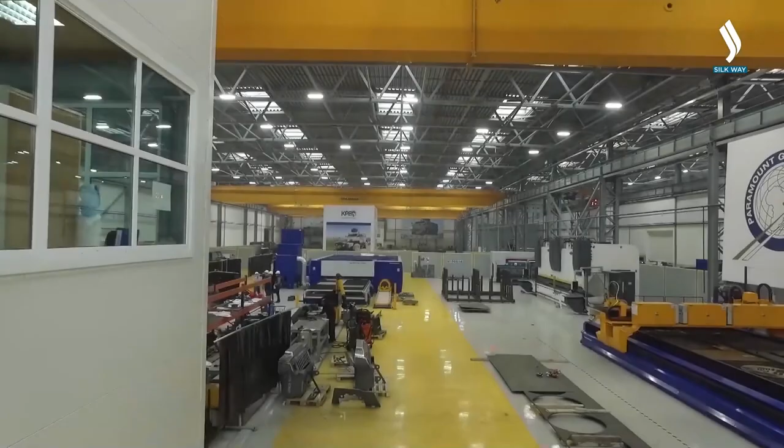Our main specialization is the production of armored wheeled vehicles using MRAP technology. When I see our machines carrying out operations somewhere, it is of course a very great pride. The responsibility for the life of the crew lies with me. I have been working since the first year of the foundation, when there was no equipment yet.

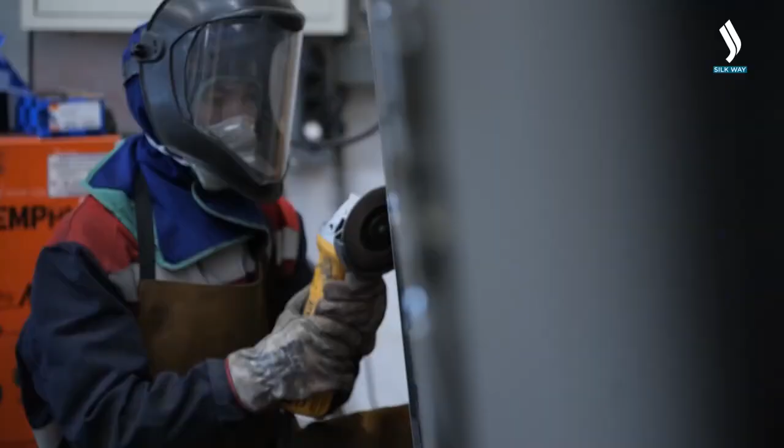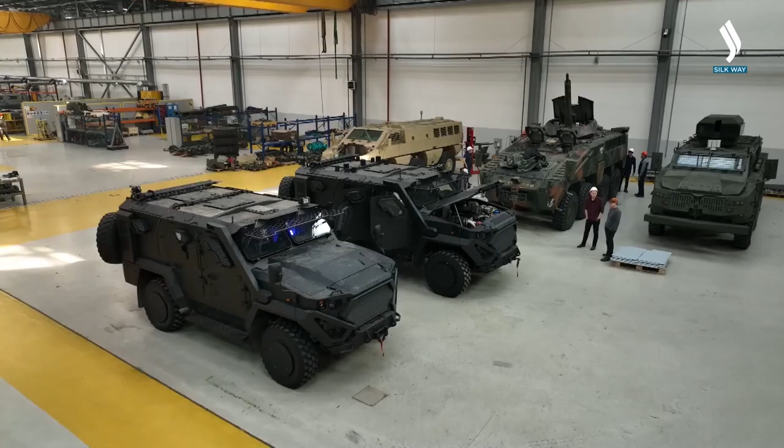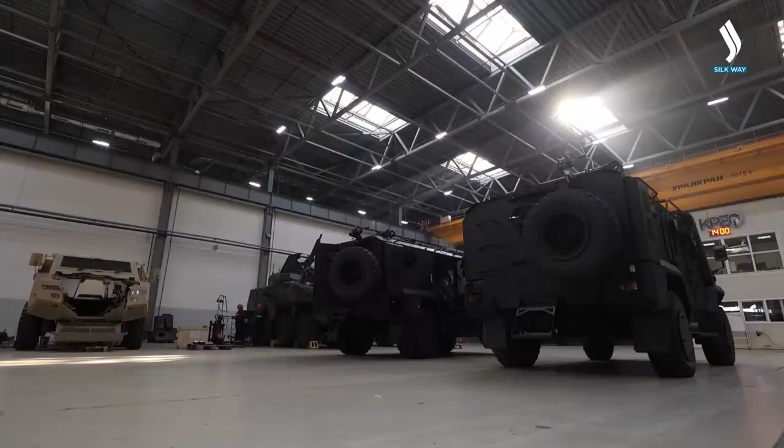Our company was founded in 2014. We started the project in the same year. In 2015, we handed over this facility, built this project and started the production of armored wheeled vehicles. Our main specialization is the production of armored wheeled vehicles using MRAP technology.

These are highly protected vehicles. They are well protected from the explosion of mines and they have high armored protection. These are modern armored vehicles that have been widely used in the world. Analyzing this market, we have come to the Paramount Group company, a large South African company in the defense industry. It produces both armored vehicles and works in other areas.

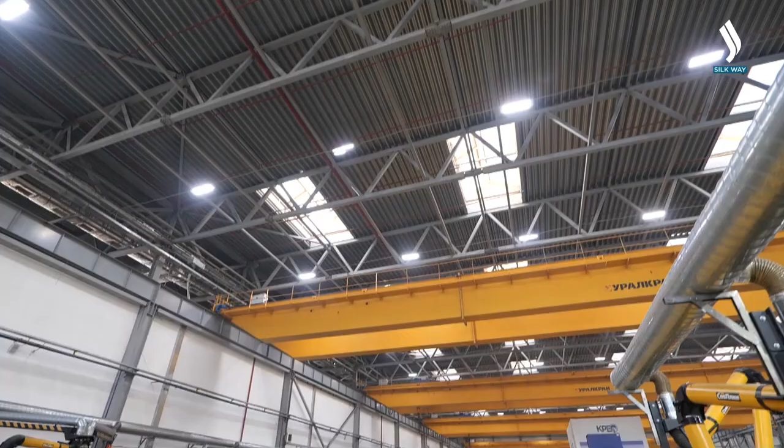Why did we choose them? Because our main condition was localization on the territory of Kazakhstan. Not a screwdriver assembly, but the localization of the entire production process in our country. They gave us all the documentation. The main value of this plant is not the buildings, but the design documentation and our personnel, which we can say we have nurtured.

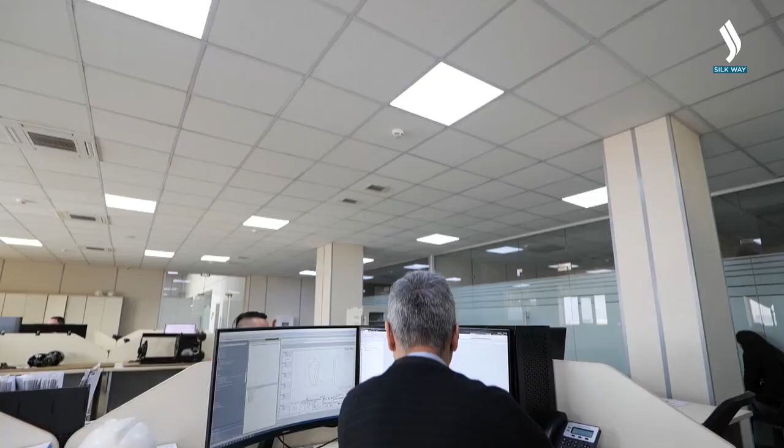I am 23 years old, born in 1999. I have been working for the company since September 2021. I got a job as an ordinary locksmith. Gradually, through my perseverance and aspiration, I got promoted. Now I am a design engineer of electrical systems.

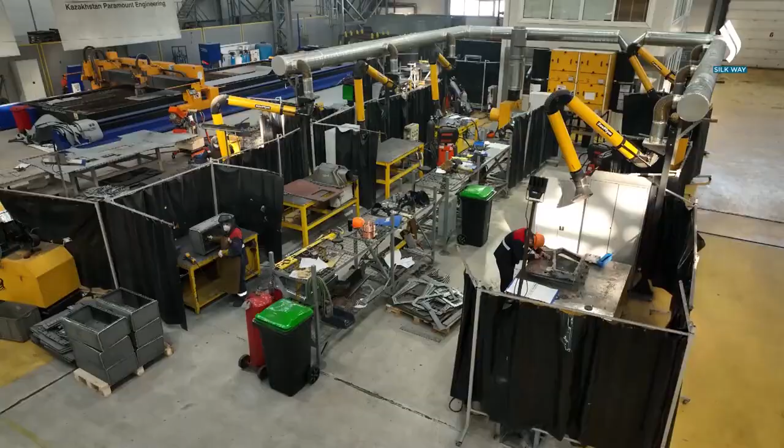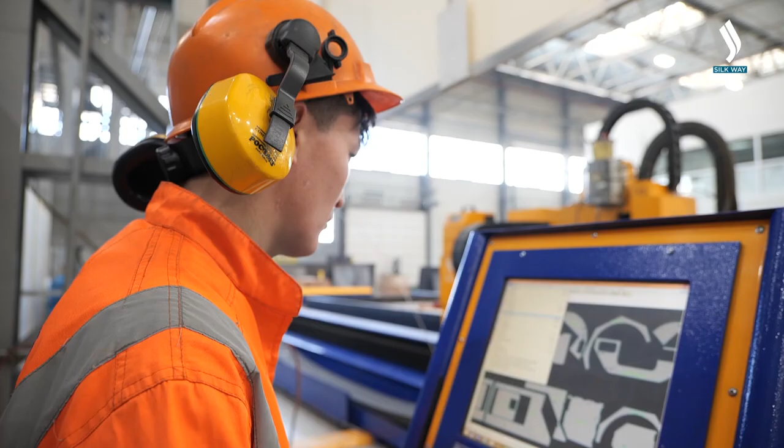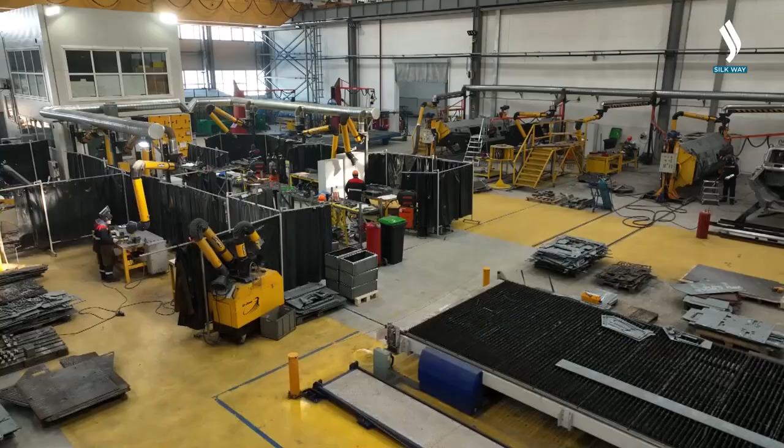I studied mechanical engineering. I came to work here by profession. I like to work with technology and the fact that there is also a computer here. I like to work with technology more than with people. In this regard, I feel comfortable. Well, like any person who wants to grow, develop, learn more. I've been here for 7 years. I've seen a lot, and I know a lot.

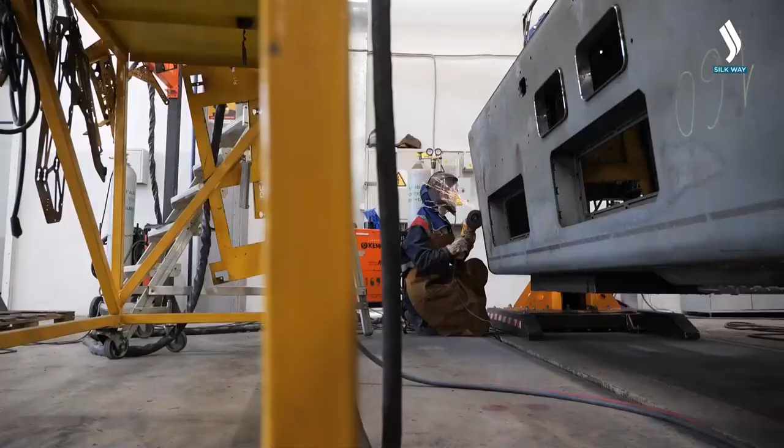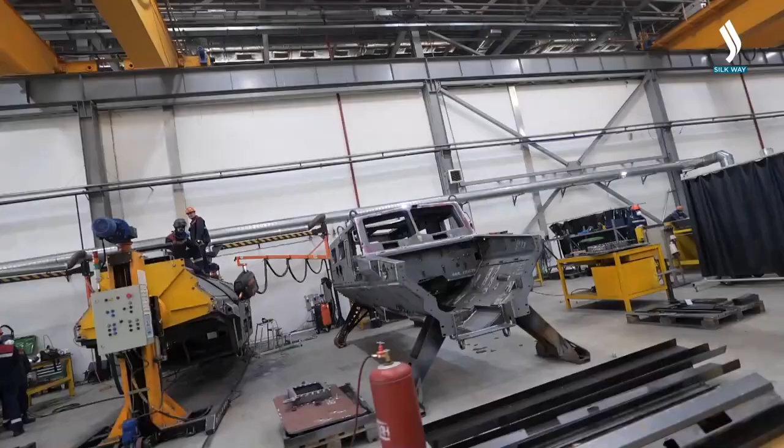The most basic thing we have here is our design office. We have Kazakhstan's certificate where we have more than 70% of localization, depending on the configuration of the machines. We have practically localized those processes that could have been localized in Kazakhstan. We can say a metal sheet comes to us, and a finished machine comes out at the end. This whole localization would not be possible without the documentation if we did not have our own office.

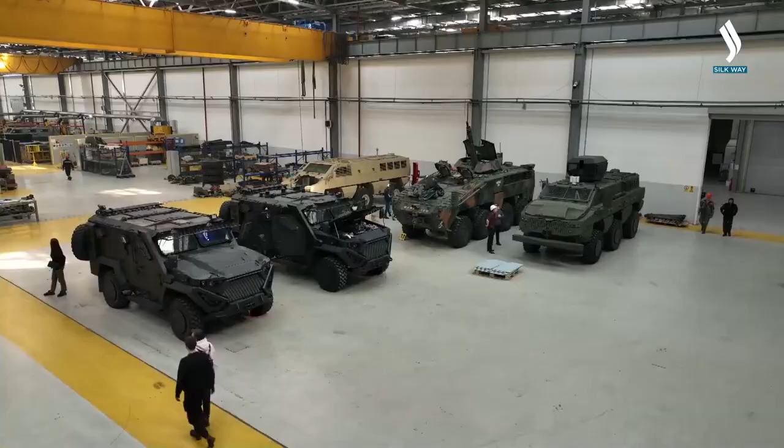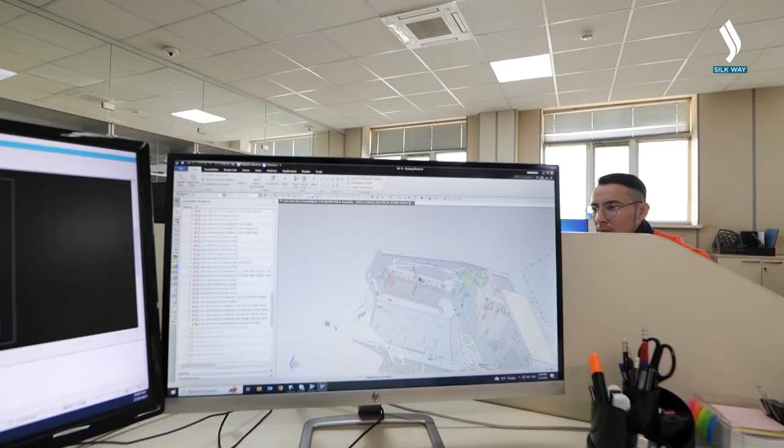We developed the design office and reached such a stage that in 2019 we began production of our own machine, Alan 2. It is a completely Kazakhstan development. From the idea to its production, it is completely made by our Kazakhstan people. This is not a technology transfer from South Africa. This is not a ready-made machine we have adopted from somewhere. The guys were drawing and selecting technical specifications by themselves. In the end, we produced a car and last year we presented it, including to our law enforcement agencies.

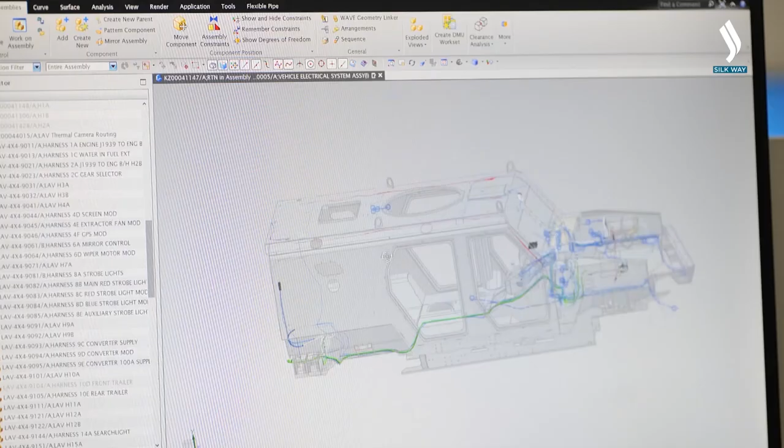After a harness is fully designed, we proceed to the actual laying of this cable. All harnesses and cables are assembled according to the standard which specifies absolutely everything, including how much cable we need to use. After the layout is completed, we send it to the foreman of the electrical assembly shop who distributes duties among electricians. That's how it's done. After the harness is fully assembled, it is delivered to the assembly shop.

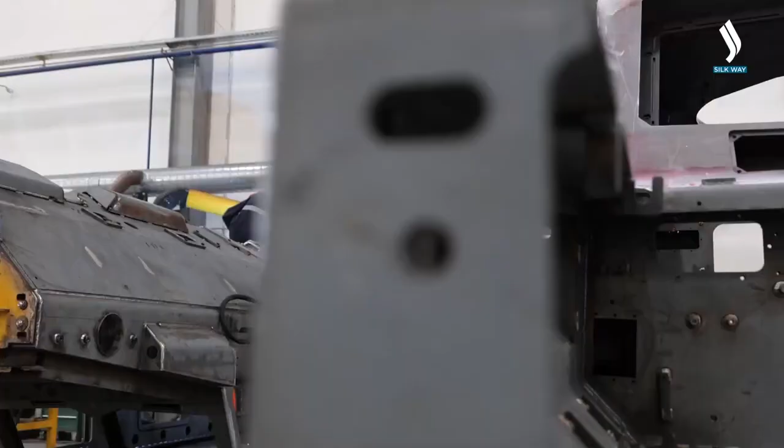Our work is full of responsibilities. Imagine military actions are taking place. We have a radiation, chemical and biological protection system. If it fails due to my mistake, the crew would be exposed to chemical attacks. I am responsible for the lives of the crew.

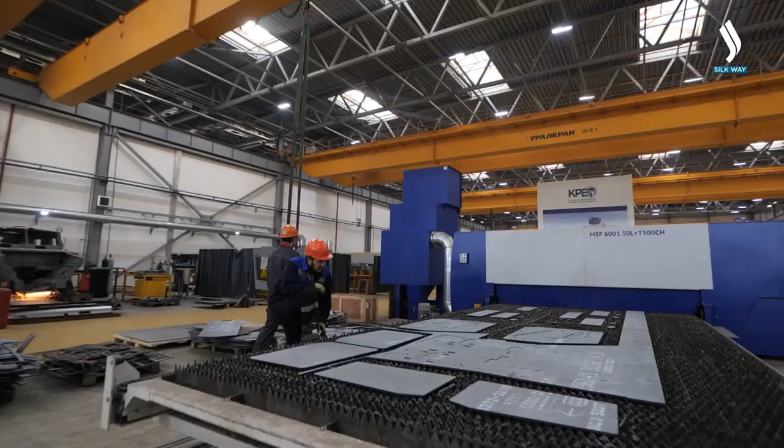The raw materials we use are Swedish-made armor steel. We buy it from there. Unfortunately, such steel is not produced in Kazakhstan. Ferrous metal is, of course, from Kazakhstan.

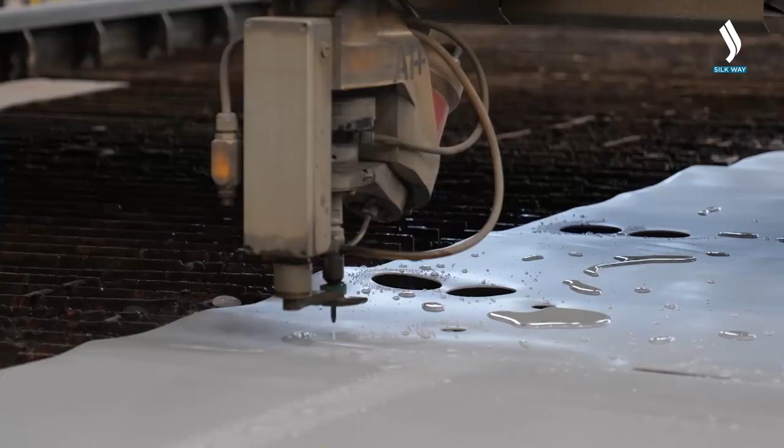Initially, you need to download the program to the machine, select the cutting technology, then set up the cutting machine itself, load the material, and bind the machine to the material. Here we have 3 cutting heads: water jet, plasma, and drilling. But in our case, we use water jet and plasma cutting, after which we start the machine and start cutting according to the specified program.

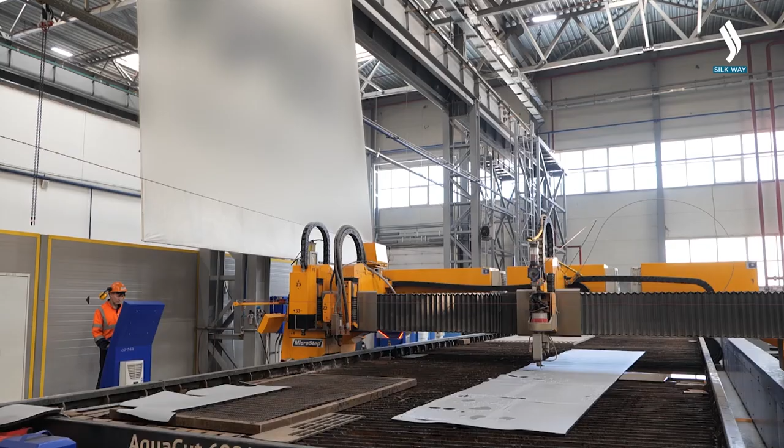Before the water is supplied to the machine itself, there is a complete filtration of water. After that, it passes to the pump, from the pump to the machining station, and then the material itself is cut. At the moment, I am going to cut the insulation. It takes literally 10 minutes.

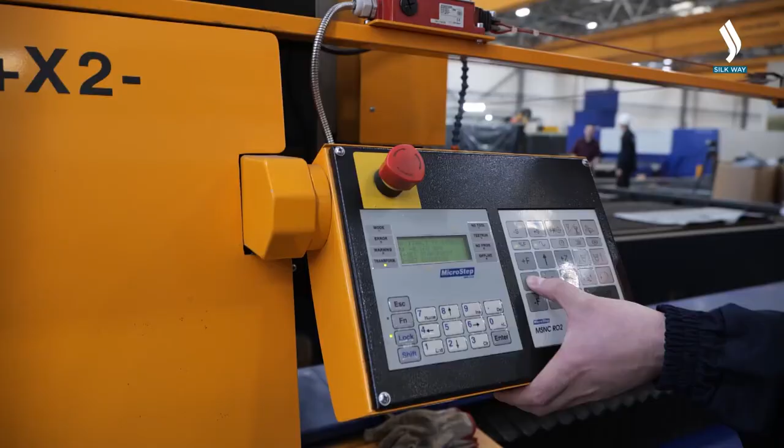This is the cutting of the thermal insulation material, which will be installed on the machine itself later. We then store it, dry it, then send it to the warehouse. Then it goes to the assembly from the warehouse. The drying process takes literally 12 hours. It does not need much.

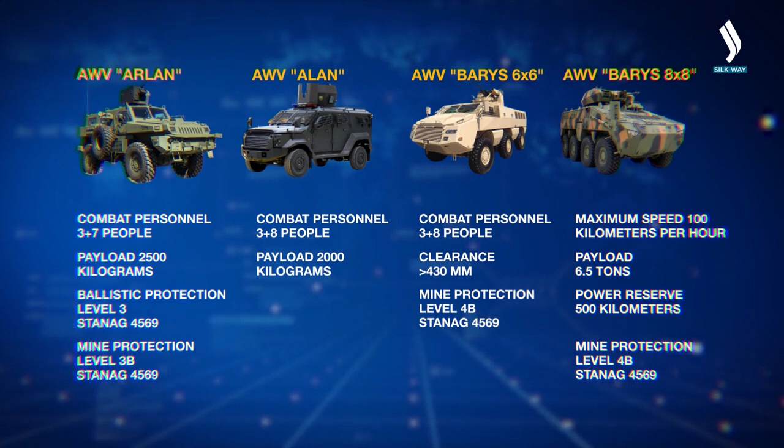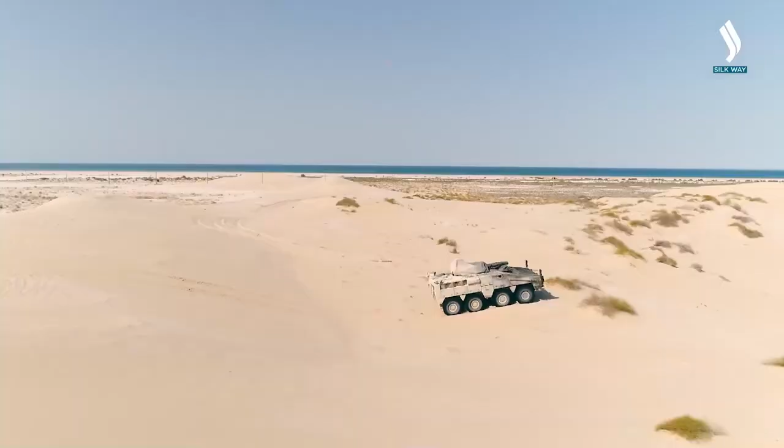We produce armored wheeled vehicles Arlan, Alan 1, Alan 2, Barys 6x6, Barys 8x8, and have also begun to produce weapons systems. Alan 1 is a lightly armored vehicle. In terms of ballistic protection it is level 3, which is quite good ballistic protection, and it has mine protection level 1. We also produce Barys 8x8 machines. This is already a heavy machine, it has a level up to 4th, and mine protection is also level 4.

We can say that we produce vehicles from lightly armored to heavily armored. These are 4x4 and up to 8x8 cars. The Barys can withstand an explosion equivalent to up to 10 kilograms of TNT, trinitrotoluol. That is, not every tank can withstand such explosions. The car will certainly get damaged, but the most important thing is that the military servicemen remain alive inside.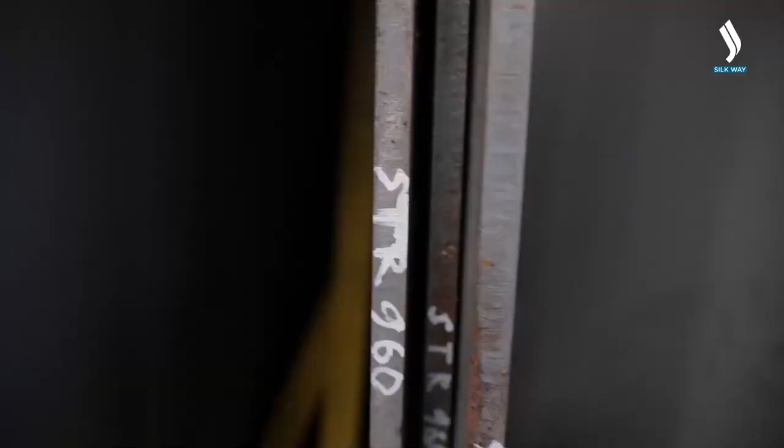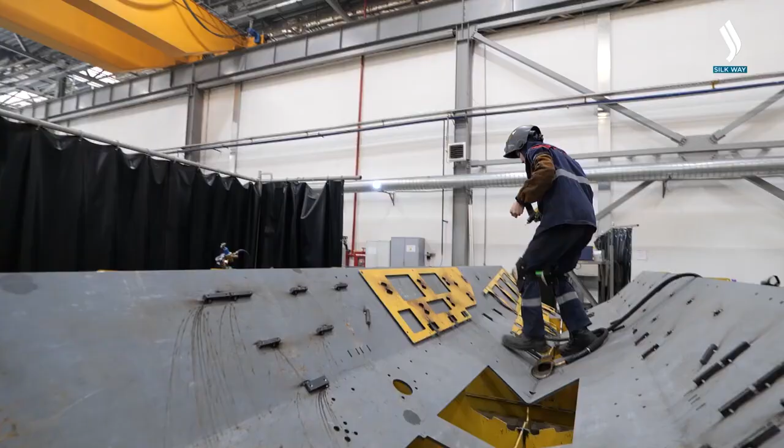There are different types of armored metal. For example, for the sidewalls on our machines it is one type of armor, for the bottom it is another. If it is ballistic protection, it is one type. If mine protection, then it is another type of armor.

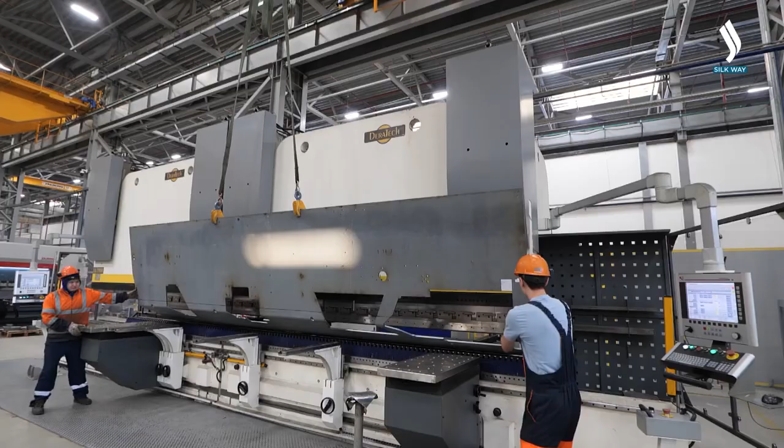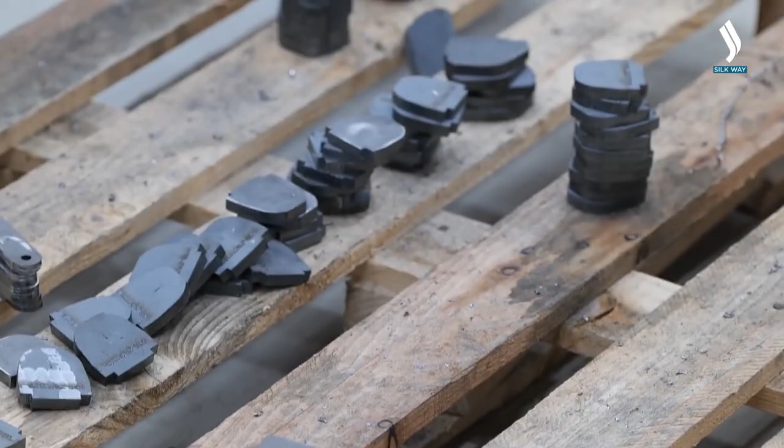This machine is designed to produce bending parts that come after laser or plasma cutting. Currently, the bottom of the armored capsule is being bent on this machine. Each type of part differs in thickness. It all depends on what is included in the drawings. It may be both a 12 mm and an 8 mm detail. Each part has a different thickness. Here we can bend up to 20 mm to 90 degrees, including armored steel.

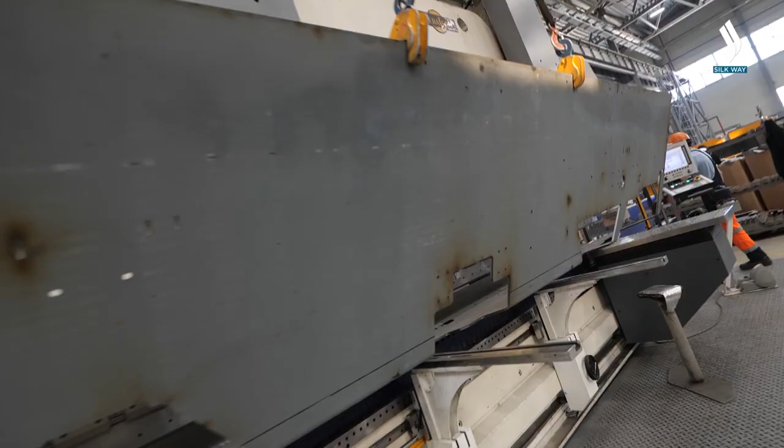There are certain nuances of bending armored steel: the spring back, the radius of the bent parts. In order to get a certain degree, you need to use another tool. In order to get a 90-degree angle, changes should be made in the manufacturing process of these parts. Depending on the need, we can bend up to 10 bottoms and up to 10 sidewalls in one shift. We receive the sheet, cut it, bend it, and pass it on to the quality control inspector for quality compliance. Then, these parts are moved to the welding shop.

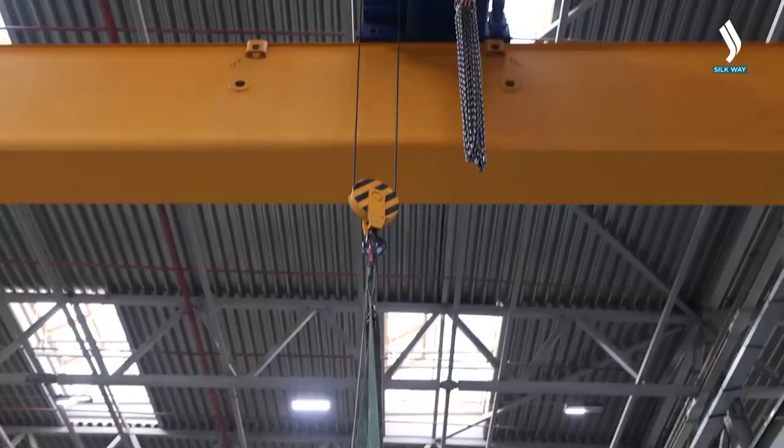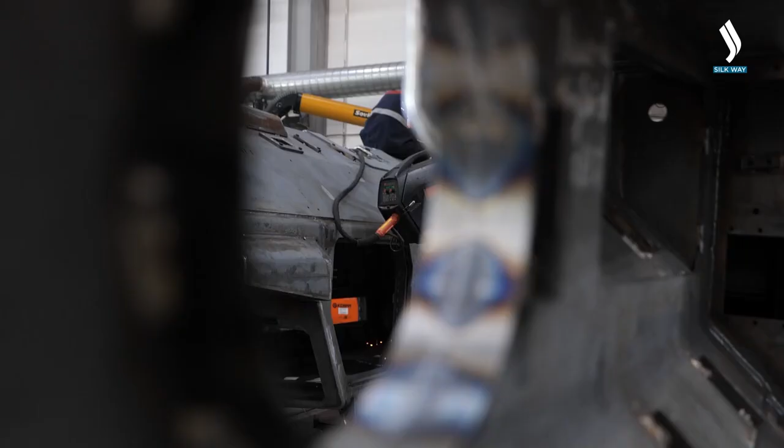Each part has permissible deviations. If these are large parts, then deviations may be larger. If the parts are smaller, then the deviations would be smaller. All this is specified in the drawings. That is, the design engineer at the stage of designing parts includes all these things in the drawing: which things are critical to observe, which are not critical. It all depends on what is included in the drawings.

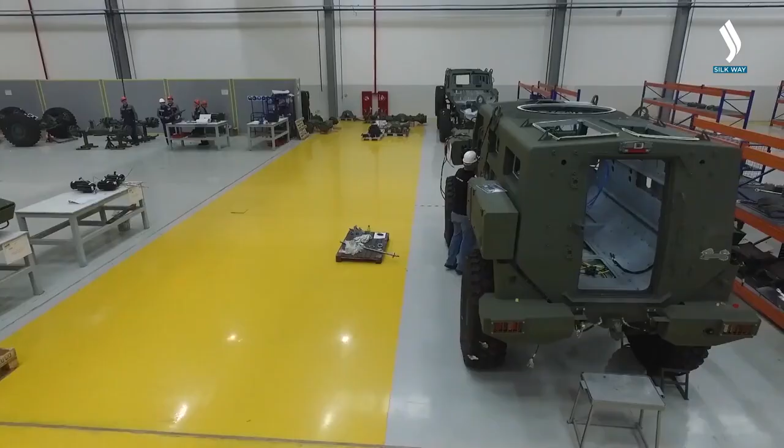Our products are cheaper than the foreign alternatives on our market. Many law enforcement agencies work well with us. We work with them. And in March, the head of state came to us. He gave a very high assessment of our plant, our production. We are very grateful and support our president. He expressed good words of support to us and the whole team. He saw our production and he gave the appropriate task to all law enforcement agencies. We have worked with all law enforcement agencies before, and we are ready to work even more actively.

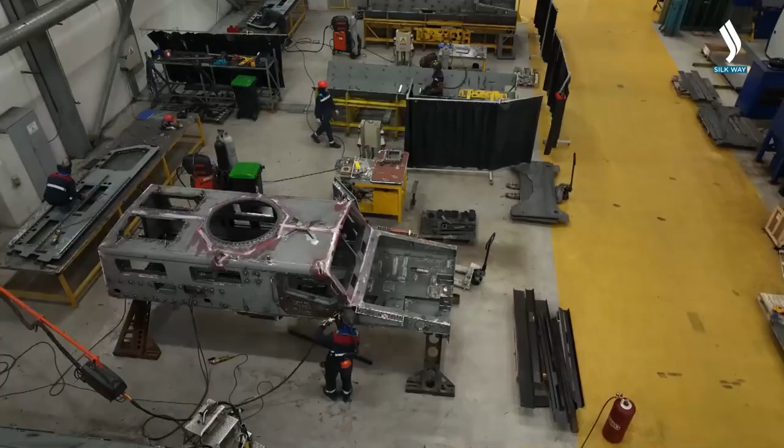We work very well with the SSS, State Security Service, with the border guards, with the Interior Ministry, and we worked well with the Ministry of Defense. But last year, for some reason, contrary to the President's instructions to support domestic production, we do not know the reasons, but they chose and expressed their intention to purchase foreign Turkish equipment similar to ours.

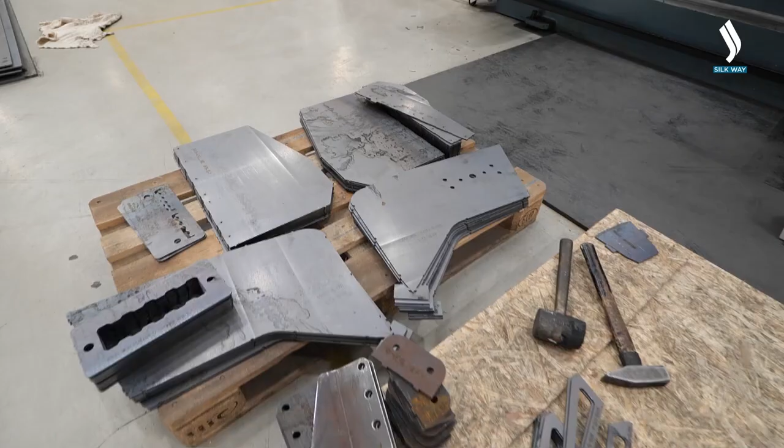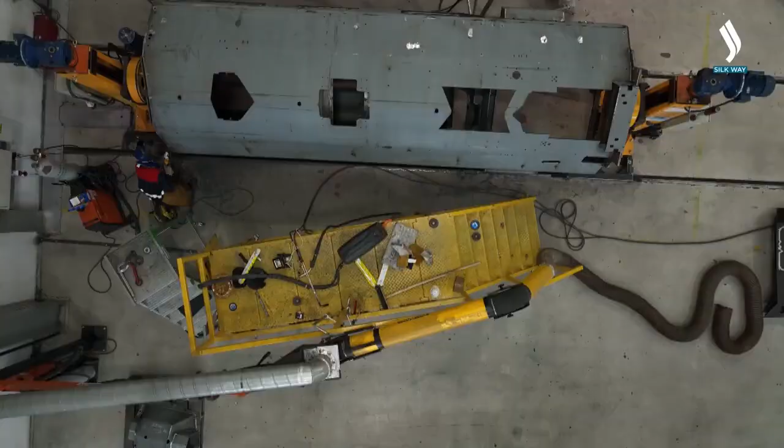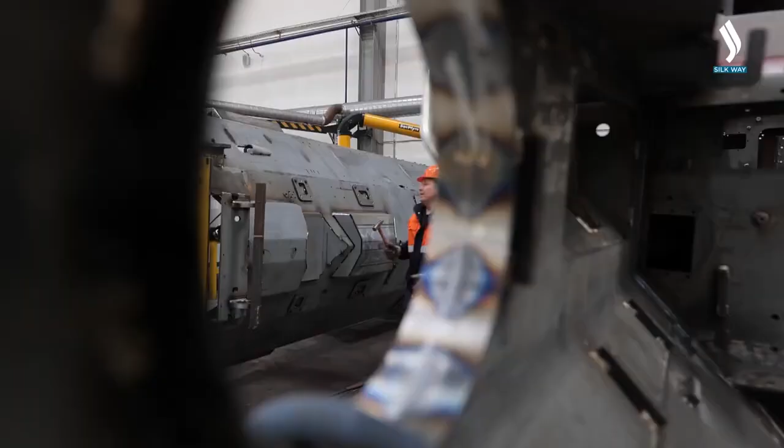After the bending shop, the material for capsule assembly is delivered to us. Our job, especially mine, is the following. We have 2 shafts. We assemble the main body of the machine on them. We are engaged in installation. We prepare all the details. After the installation is completed, the locksmith smoothes out the capsule. Then, at the last stage, before removing, we perform a revision to make sure we haven't forgotten to perform anything, or in case we have failed to complete welding. We perform the follow-up works if needed.

If everything is provided on time and there are no problems, it takes 11 days to release it from the welding shop and send it to the shot blasting shop. The welding takes 8 days. We fix all the details and seams. Then we spend a day checking all the seams and measuring chemical properties. And we also install doors.

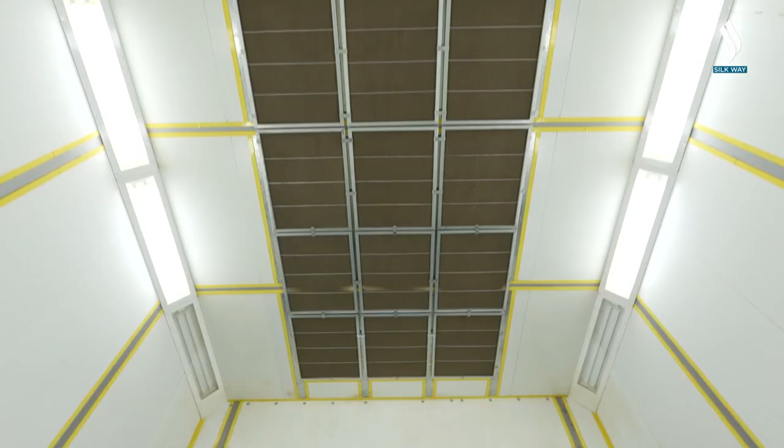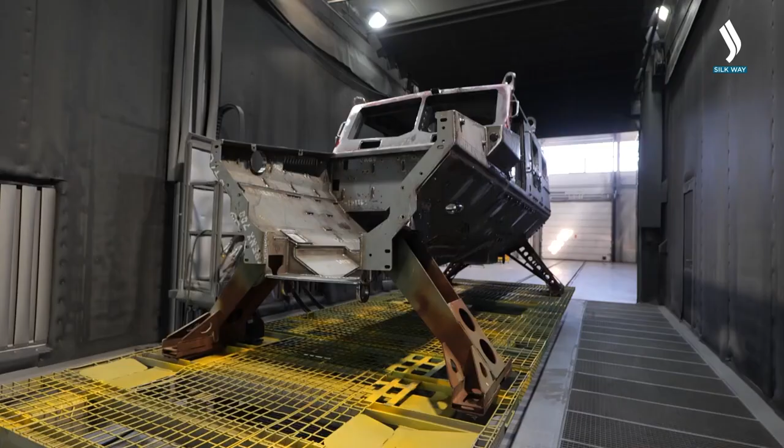Once the capsule is delivered to us, it undergoes blast cleaning to provide a high-quality paint coating. The metal needs to be cleaned. It is undesirable to apply paint on smooth metal because its service life will be short. This installation allows us to completely clean the body with metal shot, which is supplied under high pressure. It cleans the metal from the oxide film and also gives adhesion for good painting.

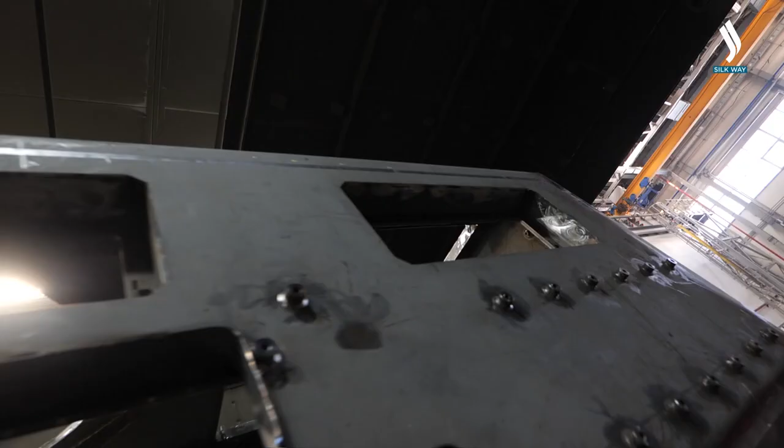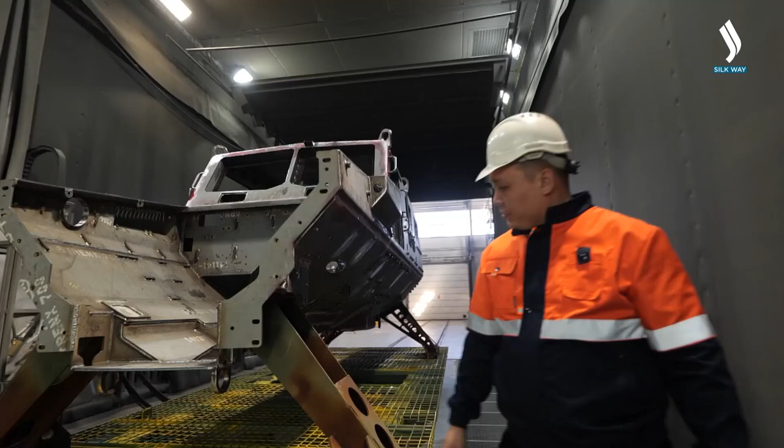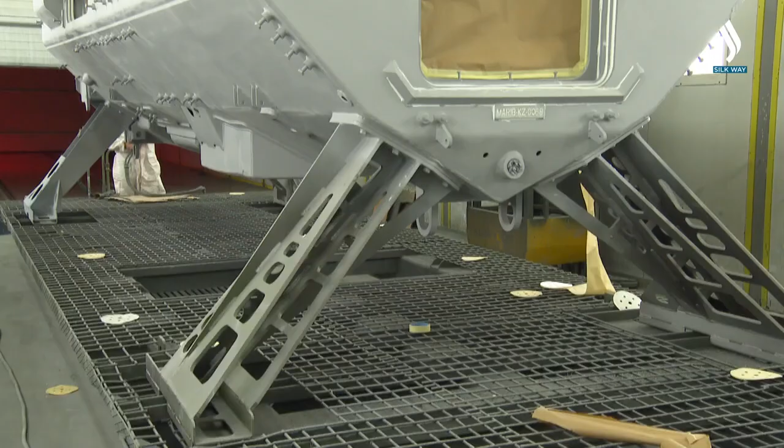Preparation for painting includes removal of the shot. We have places where the shot is collected, then it has to be blown out completely so it does not stay there before painting. All this is blown out. After the blast cleaning is completed, we proceed to the preparatory section. Then the body is primed completely and painted in the customer's color. Then comes drying. After 12 hours of drying, it goes to the assembly line.

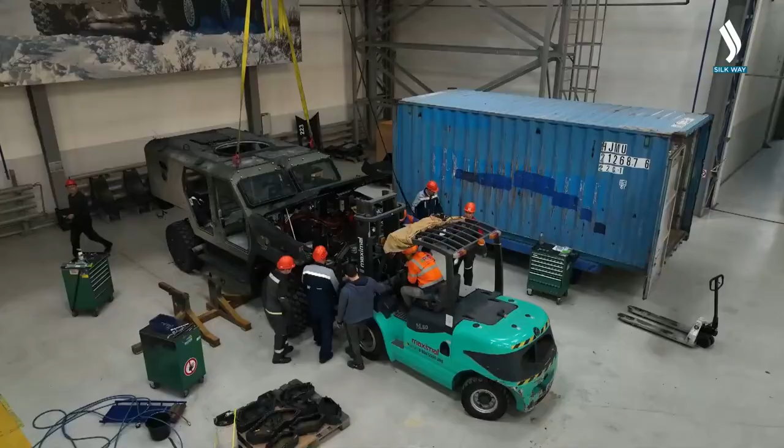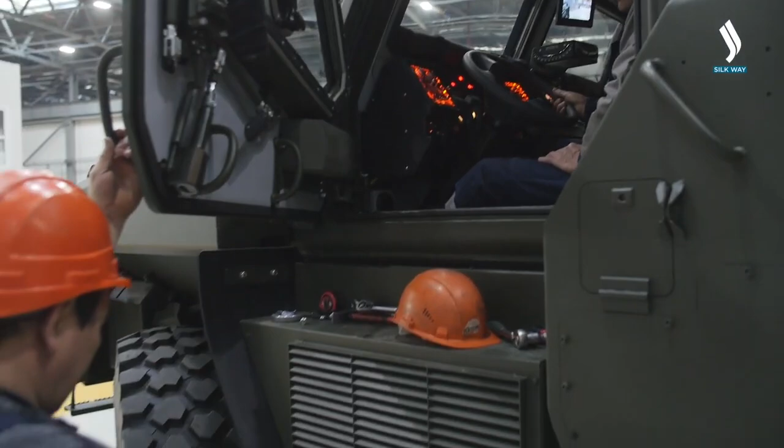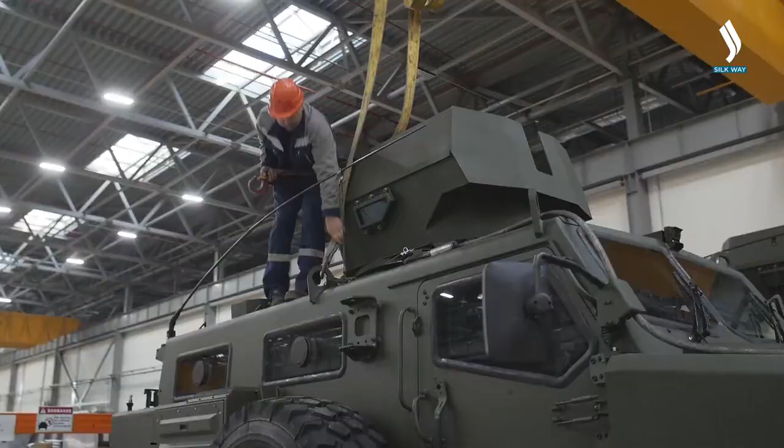When we started producing AWV, armored wheeled vehicle, we realized that the customer needed not only a car, but also a weapon system. We have created a fire control system. Our Kazakhstan developers have written this software, which is quite a complicated thing to do. We have made combat modules as well as a 30mm gun, and we have already begun to supply it to our armed forces.

Our next project is to build a factory specifically for weapons systems. This will also be a modern production. There are no analogues of such productions in neighboring countries. Financing in the field of the military-industrial complex is a difficult issue, because the STB, second-tier banks, do not finance everything related to weapons.

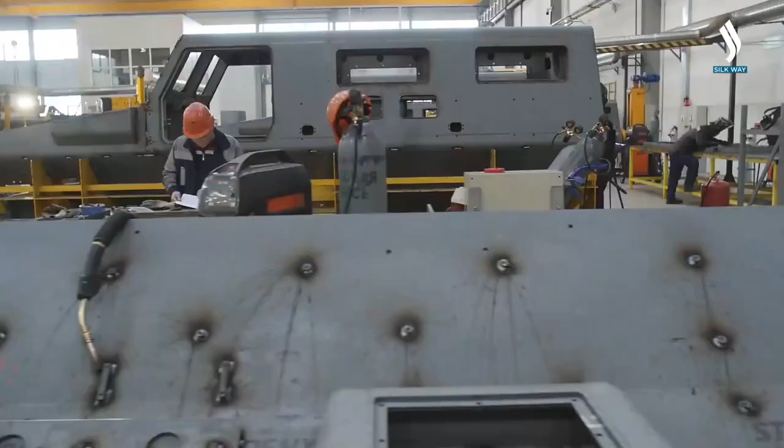In this regard, we are more inclined to work with the MIIR, the Ministry of Industry and Infrastructural Development of the Republic of Kazakhstan, within the framework of the Order of the Head of State. When he was at our production, we raised this issue. At that time, Kassym-Jomart Tokayev also gave instructions. It was the issue raised earlier on the creation of the Defense Industry Complex Development Fund. Now the Ministry of Industry and Infrastructural Development is working in this direction, because it is not only our issue, it is the issue of financing the defense industry complexes.

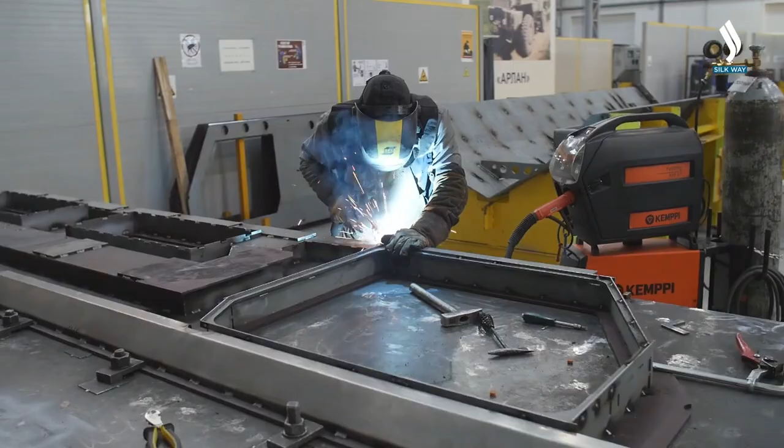When I see our machines carry out operations somewhere, it is certainly a great pride. It is gratifying that you have made your contribution.

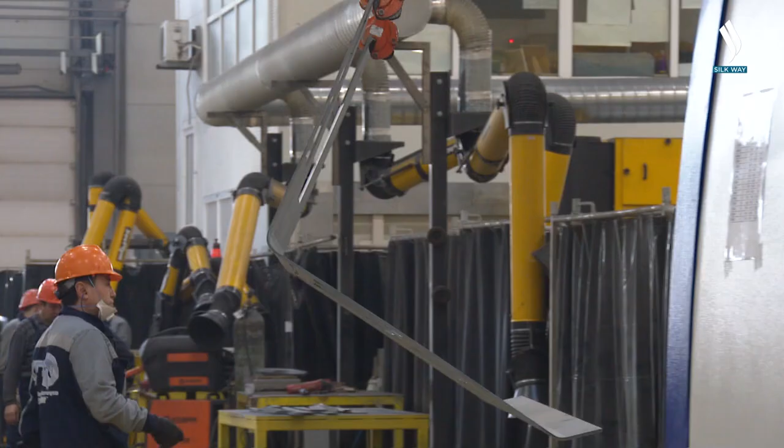I have been working since the first year of the foundation, when there was no equipment. We commissioned and installed all the equipment, including bending, cutting and turning machines. We made the first vehicle in 2015.

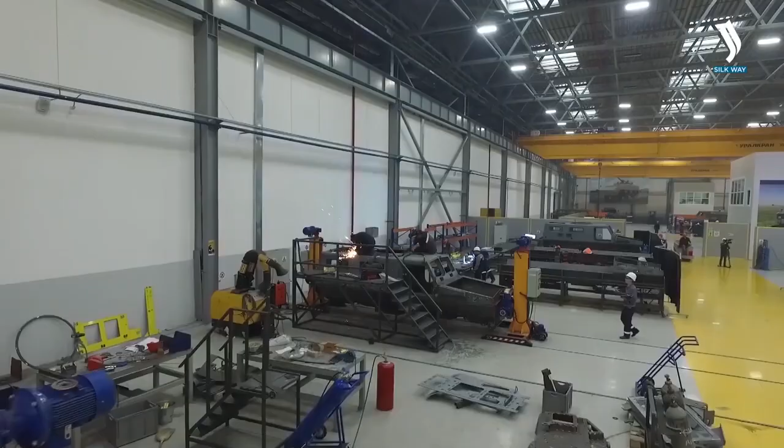We do not have such an enterprise in Kazakhstan. We like the team spirit and uniqueness.